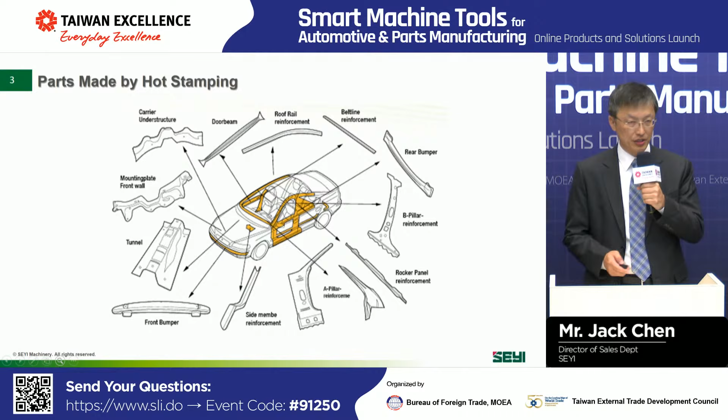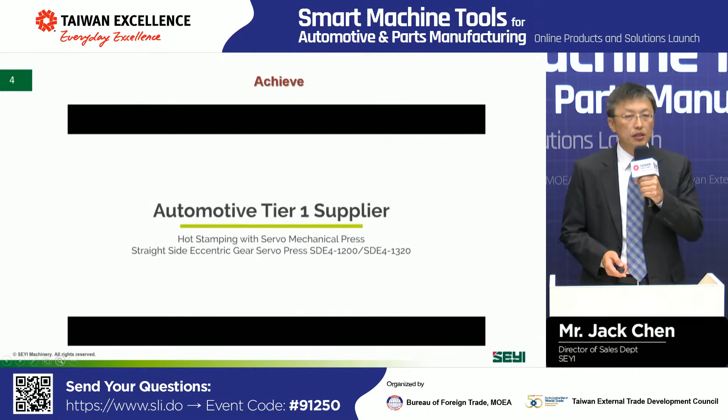This picture shows the components of car body structure made by hot stamping technology. The major ones are the A-pillar and reinforcement body structure parts. The video shows the achievement of SEYI Servopress in hot stamping applications. The press line is located in North America. The customer supplied car body parts assemblies to a Japanese automotive manufacturer.

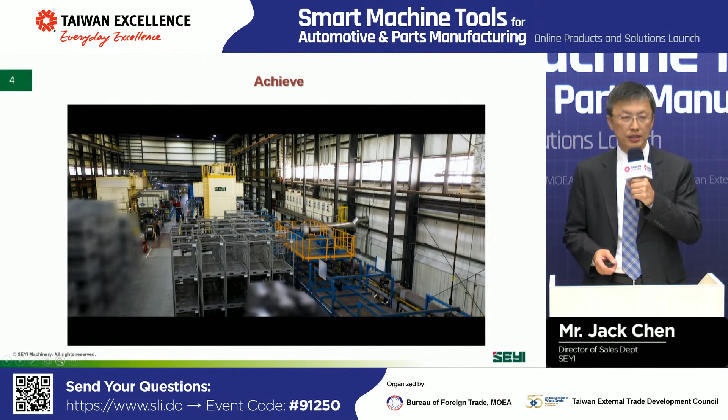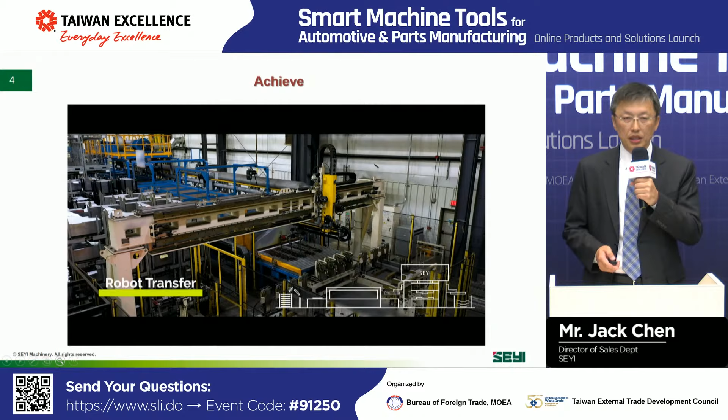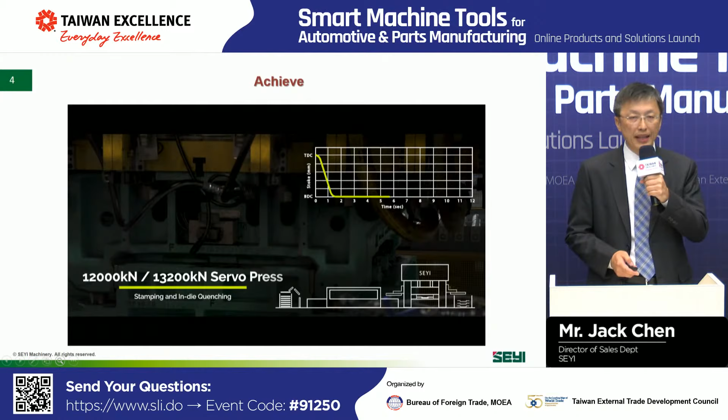Destacker separates the blank from the stack. Robot loads the blank into the furnace. Furnace heats the steel above 900 Celsius. Transfer loads it into the presses. Servopress forms the parts and dwells at the bottom dead center for 7 to 9 seconds. Transfer takes the final parts out of the press.

And this is the end of the line conveyor.

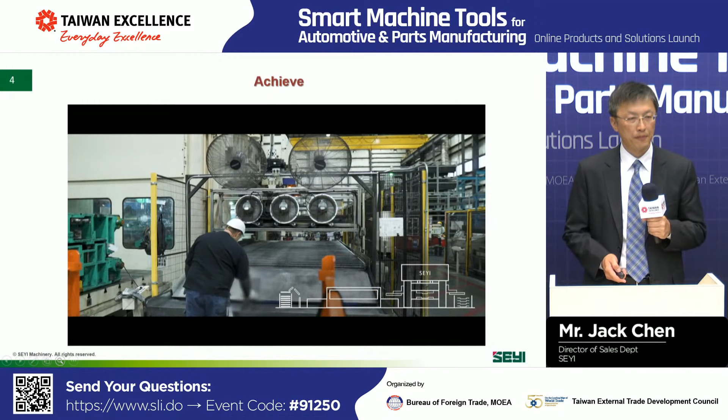Now we would like to explain why Servopress is the best solution for hot stamping application. Servopress is a mechanical transmission design. The hammer downstroke and upstroke speed is much faster than conventional hydraulic press.

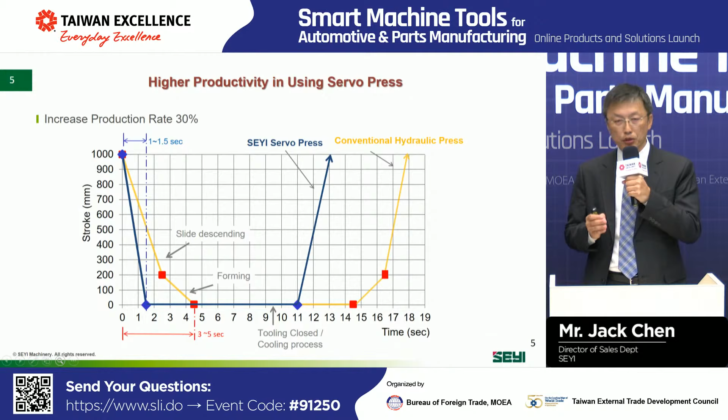Please see the blue line at the chart. Servopress takes only 1.5 seconds to reach bottom dead center, but hydraulic press takes 4.5 seconds. The total cycle time of a Servopress is 5 seconds faster than conventional hydraulic press. Servopress increases production rate by up to 30%.

When the hammer is at the bottom dead center, Servopress uses a mechanism structure to maintain the press's tonnage capacity. There is almost no power consumption during the 7 to 9 second dwell at the bottom dead center for the cooling process. Hydraulic presses maintain tonnage by running a hydraulic power system, which includes a motor and pump.

Servo system has a much higher energy efficiency rate than hydraulic system. SEYI servo system uses air cooling, but hydraulic presses use water tower cooling. Servo presses can save up to 70% energy and 50% running cost.

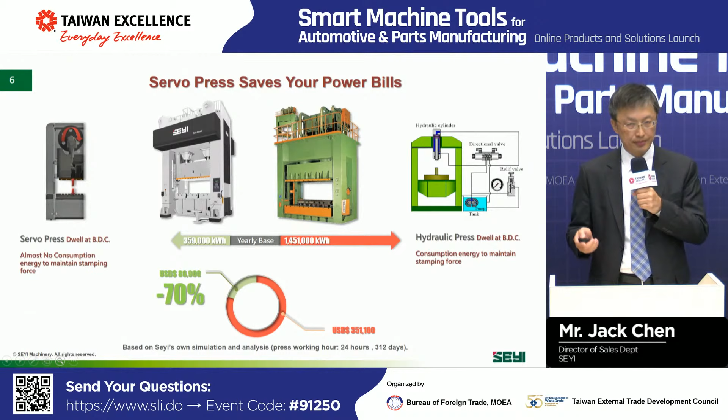Servopress takes less duration during downstroke and the forming parts. It means Servopress has extra time available to do in-die piercing, trimming, or punching holes before reaching 500 Celsius during the cooling process, which is the lowest temperature limit before the material gets too hard to cut.

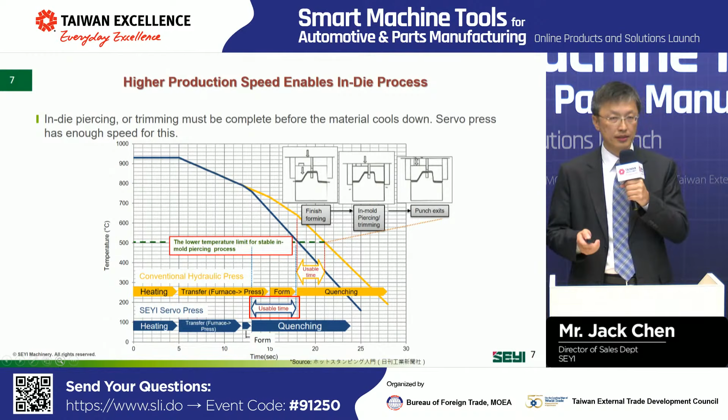When the hot blank stays in the tooling, the blank temperature in the area touching the tooling is lower than where it's going to form.

Servopress has a fast forming speed. It can minimize the temperature difference between the two areas and reduce the thin material effect, as shown in the chart. Also, the fast forming speed feature allows the steel to start the cooling process at a higher temperature point, giving the cooling process enough buffer to minimize the possibility of producing defective parts.

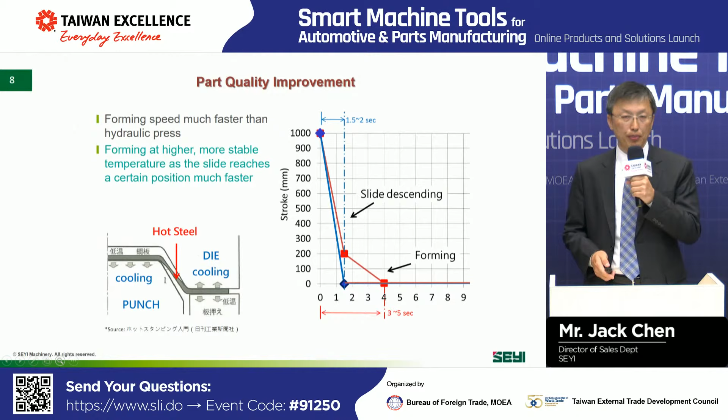SEYI's servo motor is specifically designed for stamping process applications with higher torque and lower RPM features. It can be applied to a standard press transmission design without adding a reducer or link mechanism in between. Simple design is the best design.

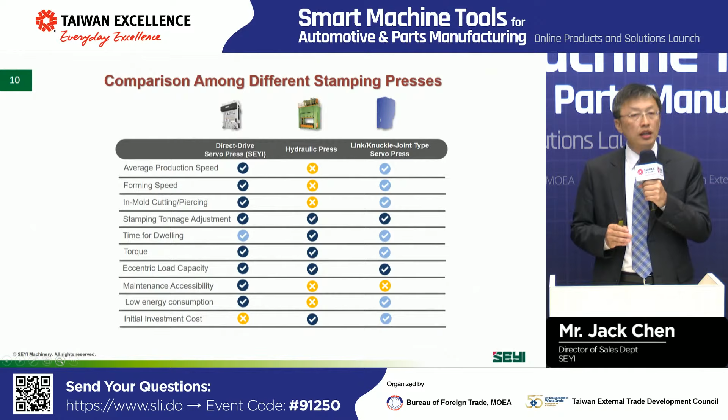This is the chart summarizing the Servopress's features for hot stamping application. The Servopress has the best performance compared to other press solutions in features such as production rate, forming speed, piercing in tooling, offering full torque during die crossing, low maintenance time and cost, and effective energy consumption, which is low running cost.

Servopress is a new generation stamping press. Its benefits include free and accurate motion control to give customers flexibility in production, deliver high quality parts, and save energy. It is also smart and intelligent to support IoT and Industry 4.0.

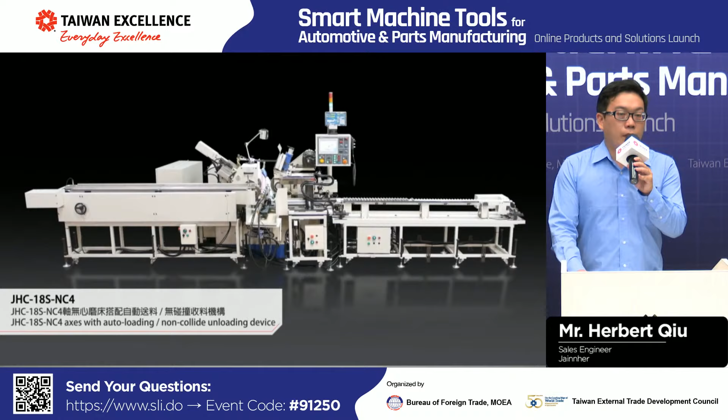A grinding machine, also known as a grinder, is a type of machine using an abrasive wheel as the cutting tool. It is used to finish workpieces that must reflect high surface quality and precision of shape or dimension, which are hard to achieve by just using a turning machine.

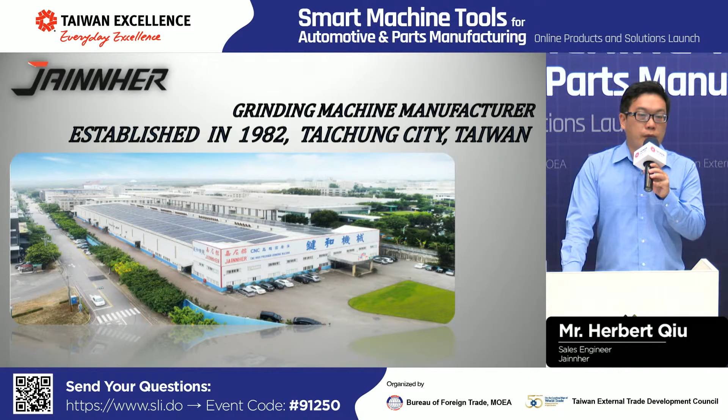Jainnher is a professional grinder manufacturer in Taiwan, established in 1982. Our headquarters is in Taichung City, Taiwan, and we have a branch in Kunshan City in China, providing after-sales service for the Chinese market. This photo shows Jainnher's Taichung factory.

All of our products are assembled here, all made in Taiwan. This facility is 17,000 square meters, and currently we have 133 employees.

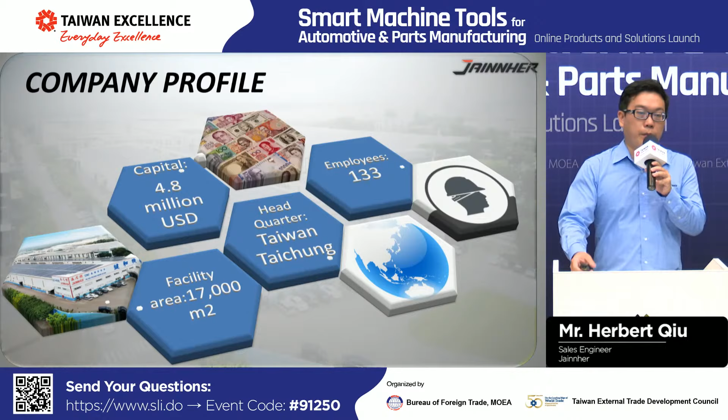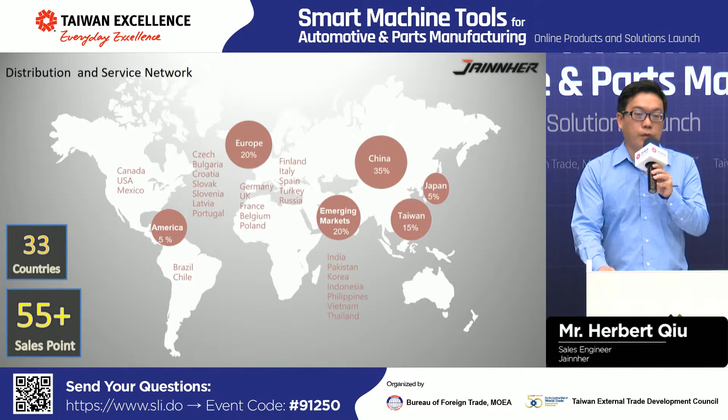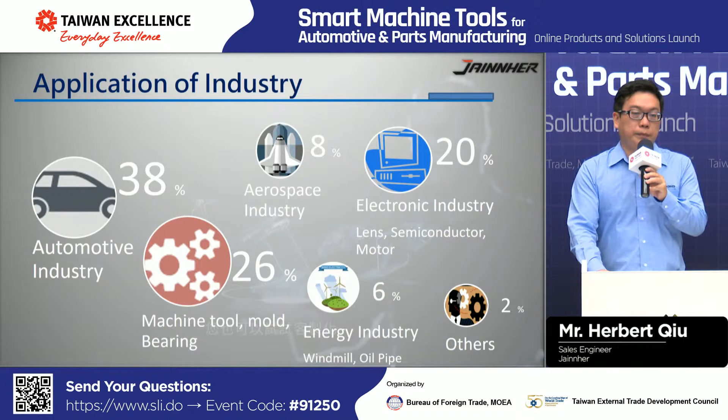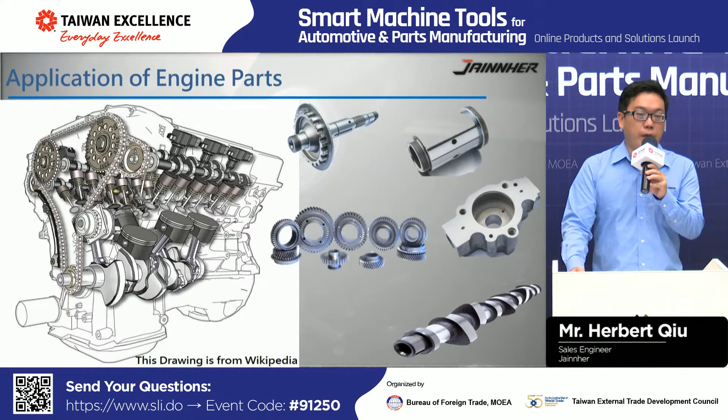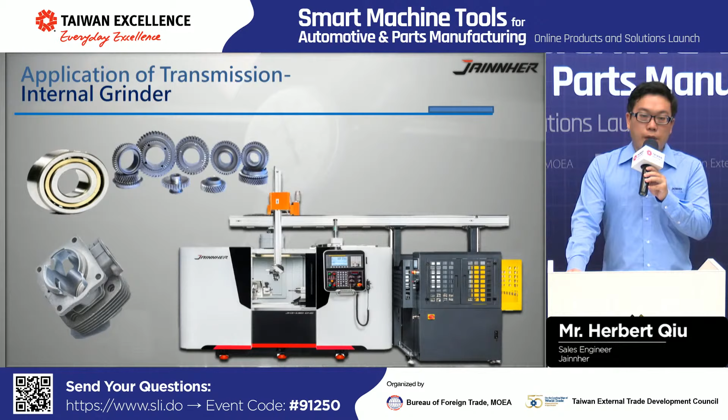Furthermore, for some gears or bearings that require great precision in the internal diameter, we will use our internal grinder. Also, some gears and bearings with both external and internal diameter have specific precision requirements, so we have the double spindle grinder, which can process internal and external grinding in just one machine.

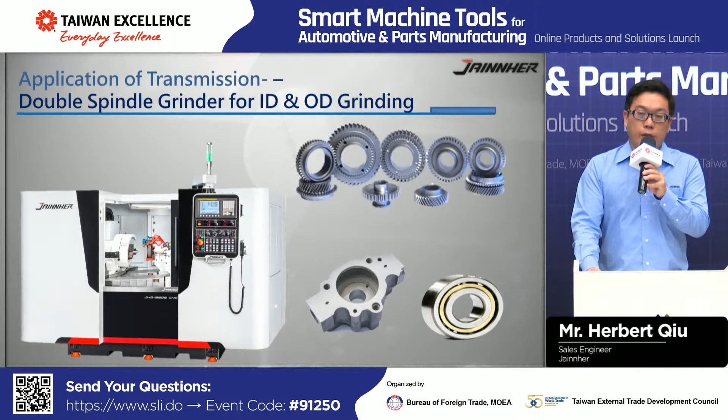Except for the engine system, there are many parts which need to be grinded in automotive transmission. For example, some shafts, like transmission shafts. Most of these shafts will need the cylindrical grinder to handle the external diameter and surface quality.

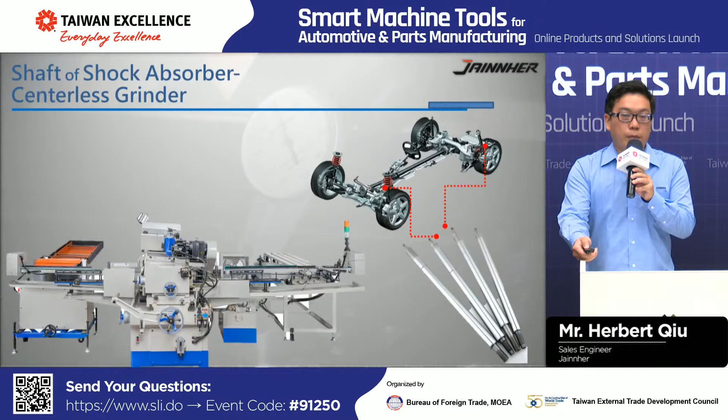We also have a centerless grinder, which is for external grinding. It has outstanding efficiency and is compatible with various kinds of automatic devices that can feed raw parts automatically, increasing production capacity. Here, I would like to show a video about a shock absorber grinding application.

In the video, you can see how the centerless grinder works smoothly with the automatic feeder and the diameter gauge.

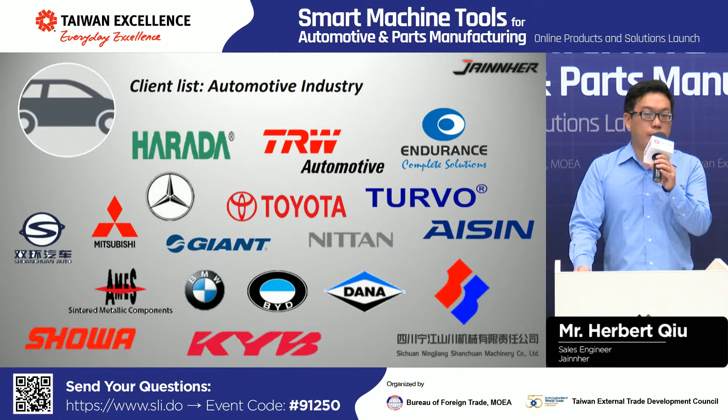For your reference, these are some of our clients from the automotive industry.

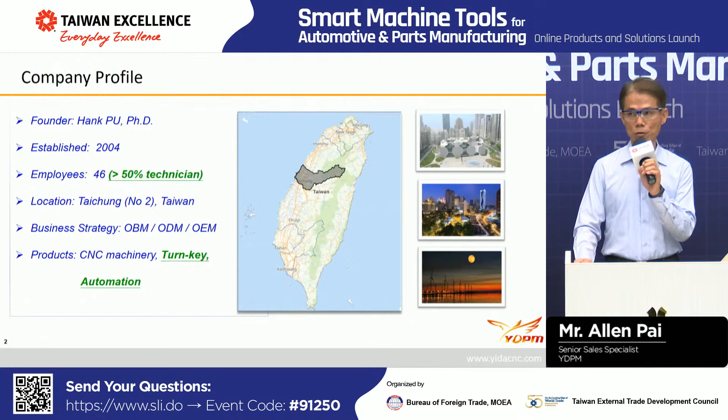In the last 10 years, we got some orders for piston projects. This project is made by our CNC lathe. The case is in Indonesia.

Also, we got some orders for processing parts of the car. This case in Thailand is for mass production.

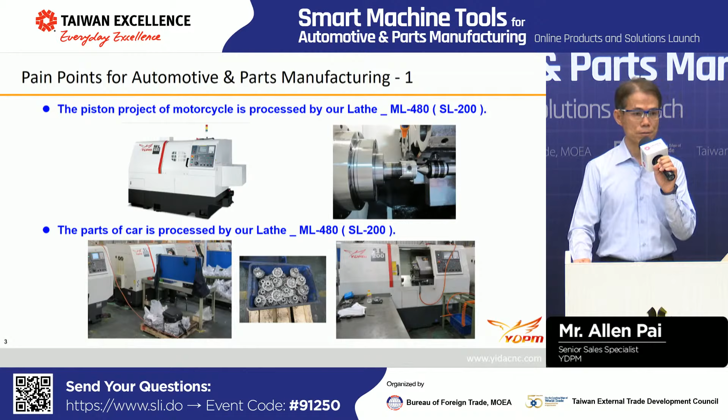Another case, we also sold our horizontal machining center for aluminum car engines. This order is for 13 sets of HMC. Now our machines are working all day, non-stop, and running well continuously.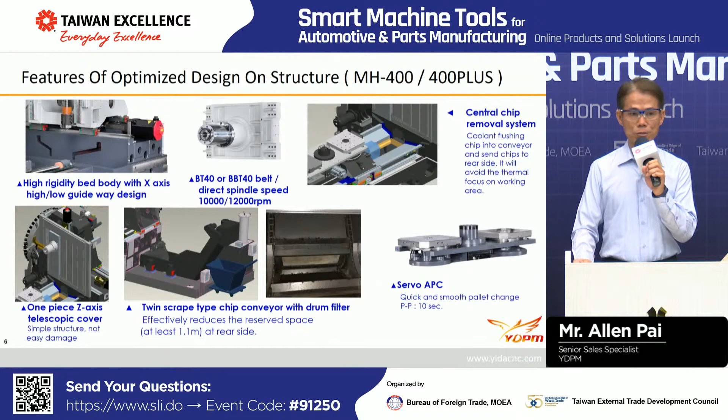This slide is about the features of optimized design on our machine structure. Especially, we designed a high-rigidity bed body with X axis high/low guideway design. We also designed a direct drive spindle, BT40 and BBT40, with 10,000 and 12,000 RPM, and a servo pallet changer for quick and smooth changes.

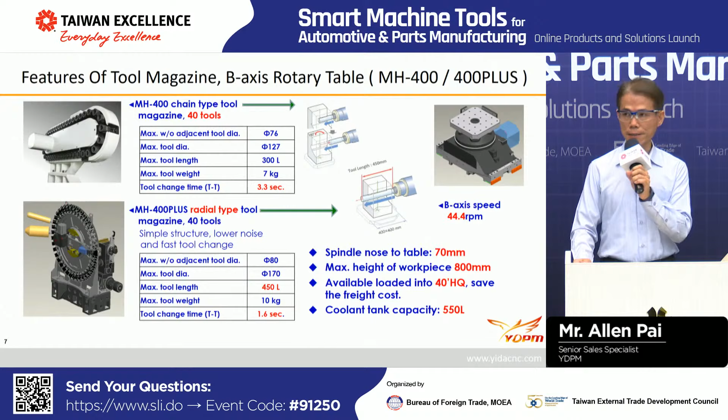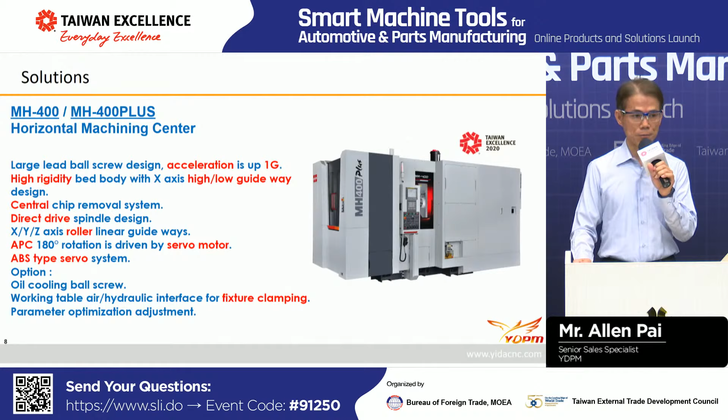Now we talk about solutions on our machines. The HMC machine with the 400 working table, MH400 and Plus, gives you accessories like 1G and high rigidity, high/low guideway, and a central chip removal system. Also, pallet change, servo motor, and ABS type servo system.

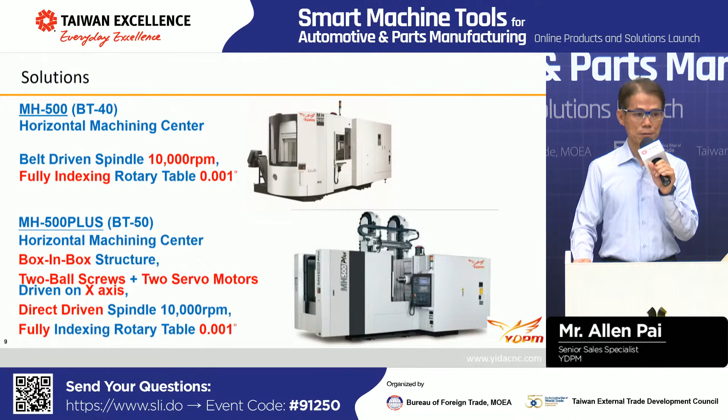This one has a working table size of 500. You can get a fully indexing rotating table on our MH500. Also, the second model, MH500 Plus, features a special box-in-box design and two ball screws with 2 servo motors on our X-axis.

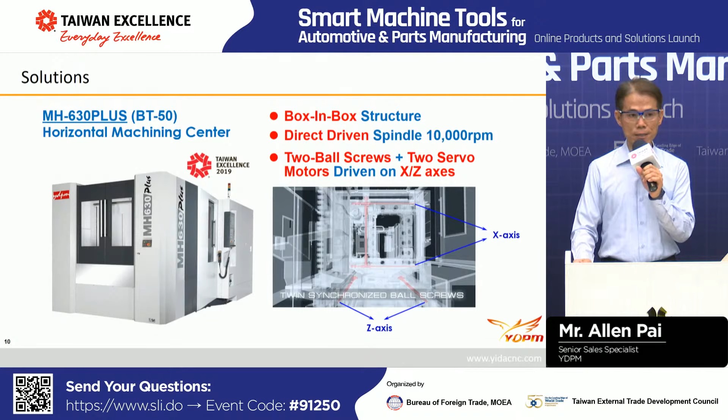This one is our biggest one, the HMC model code MH630 Plus BT50 taper, featuring 2 ball screws and 2 servo motors on not only the X-axis but also the Z-axis. You get smoother and faster moving.

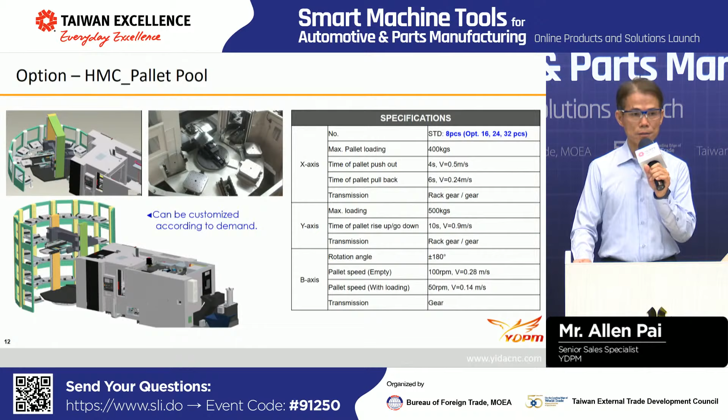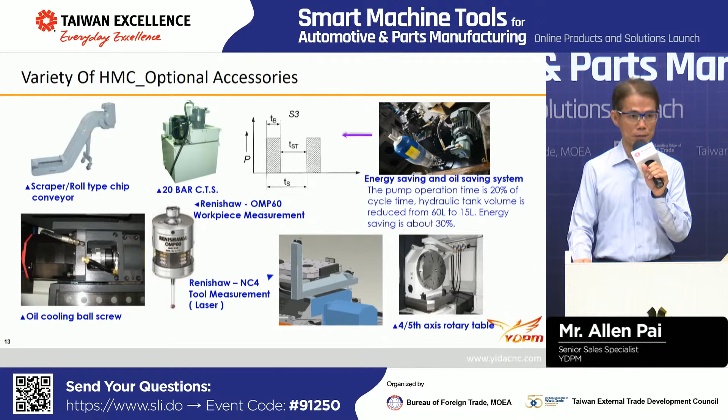These are our main products: CNC turning machines for about 70%, and horizontal and vertical machining centers around 30%. We can also do automation production with robots.

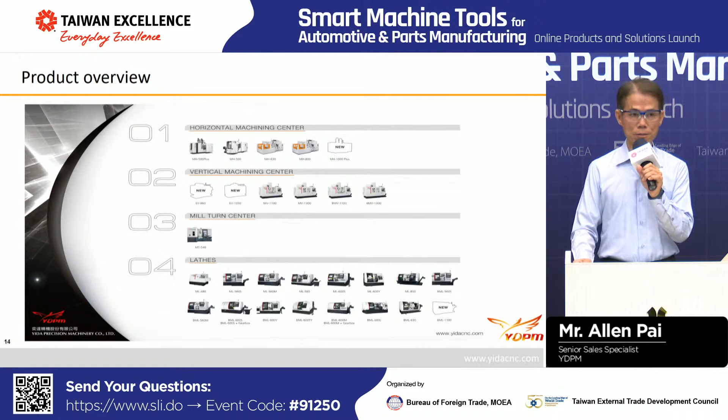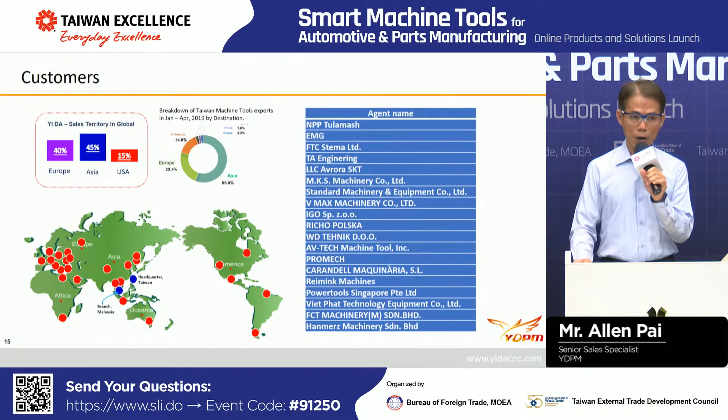These are our customers and our sales territory globally: Europe 40%, Asia 45%, and USA 15%. Our regional office is in Malaysia.

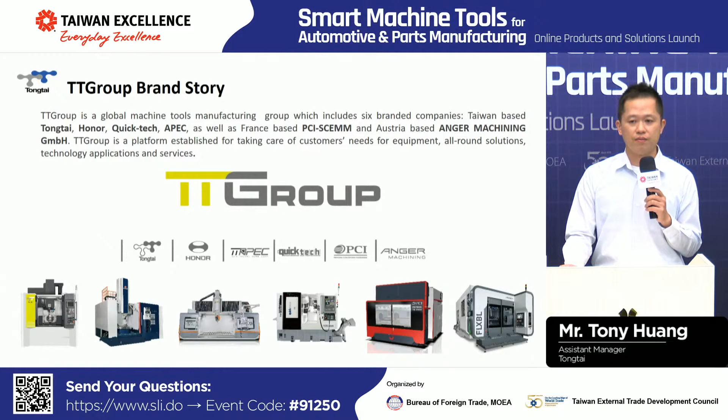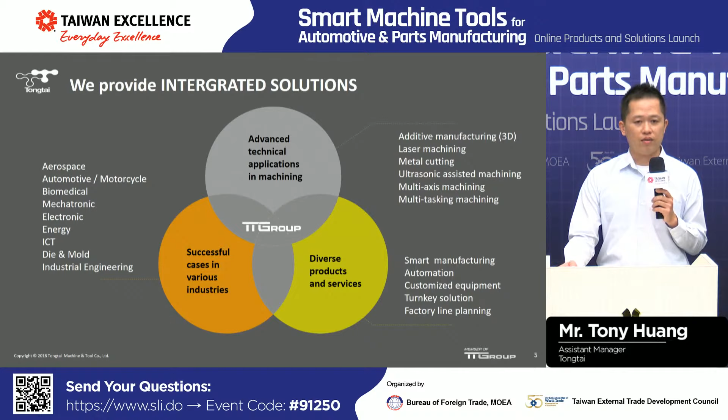The core strength of TT Group is to provide different kinds of solutions for different kinds of industries. Being a total solution provider, Tongtai is not only focused on complete line integration, but also strong in new technology innovation like metal 3D printing and ultrasonic machining.

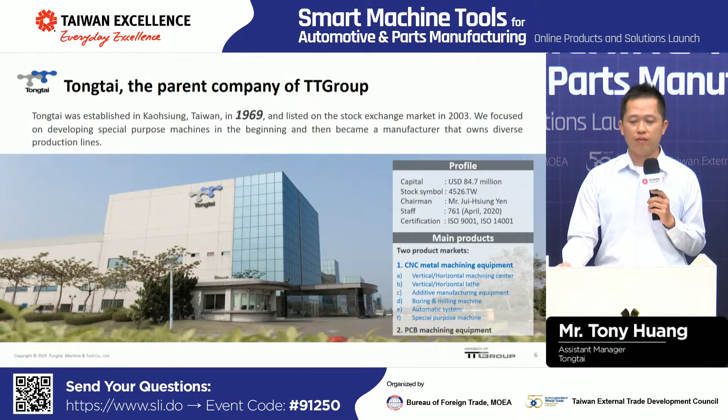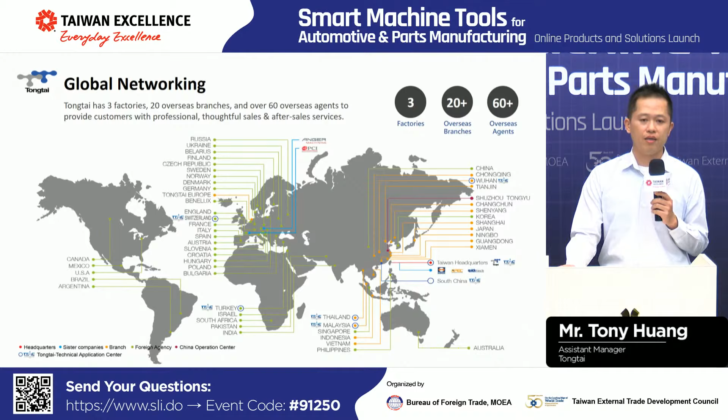Tongtai celebrated its 50th anniversary in 2019. The company started out making special purpose machines, and now we have a wide range of CNC machines. For best customer support, Tongtai has more than 20 branches and cooperates with more than 60 agents worldwide to do marketing and provide immediate service support.

Industry 4.0 is a well-known global trend for everyone. Tongtai is a pioneer in Taiwan by offering the first smart manufacturing line for crankcase machining.

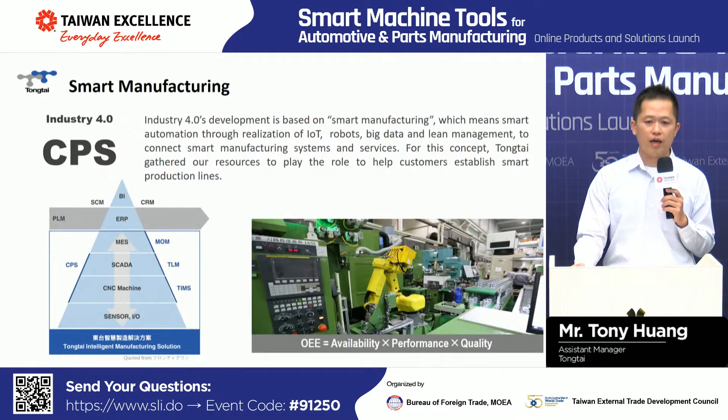How can Industry 4.0 make production lines smart and efficient? How do we reduce defective rate and achieve better productivity when market demand is changing to small volume, large varieties? The following slides briefly show an example of a solution for different types of crankcases to be made on the same production line.

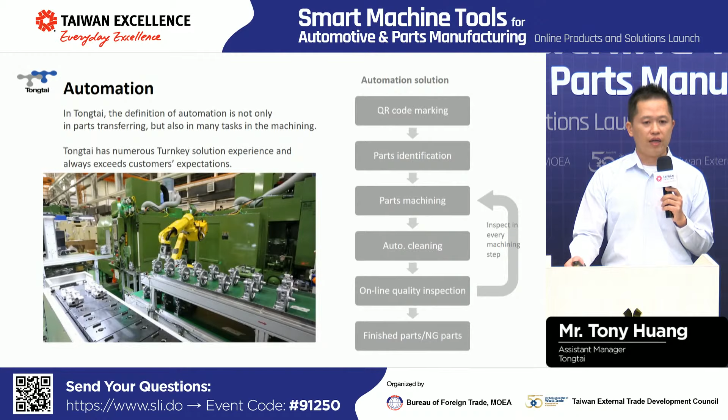Tongtai is able to integrate different kinds of applications or utilize multi-axis machines to ensure the production line is more compact and efficient. Of course, automation should be there. However, the automation we are talking about here covers the complete process from QR code marking, part identification, machining, online inspection, and cleaning, not just part loading and unloading.

We also adopt a cyber-physical system to simulate what we are able to organize, from individual machining programs to complete-line operation sequence. Compared to the past, CPS can find any operation bugs quickly and avoid errors before the production line begins. It saves lead time and cost in manufacturing.

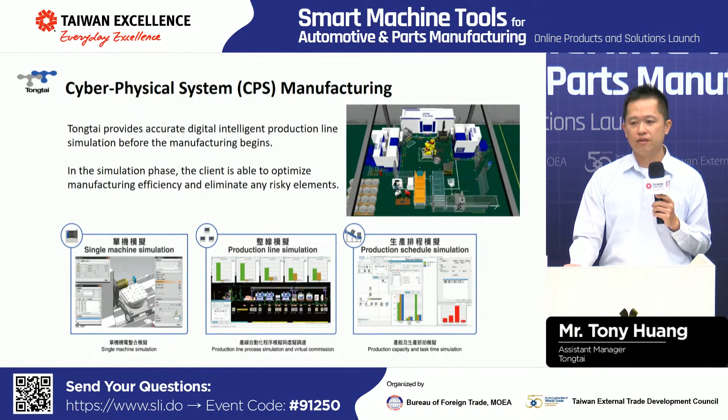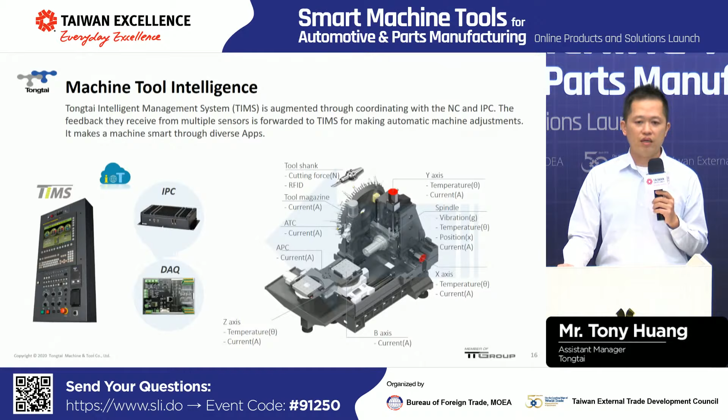To make the machine smart, we install different kinds of sensors on the machine to collect different signals. Through Tongtai Intelligent Management System, which we call TIMS, this signal is converted to production data for monitoring. So once the complete line is connected, real-time production data can be collected and presented in our monitoring platform, and further combined with MES and ERP for production plan arrangement.

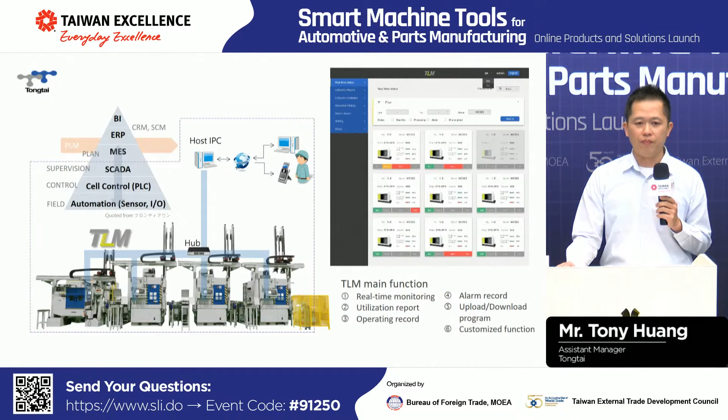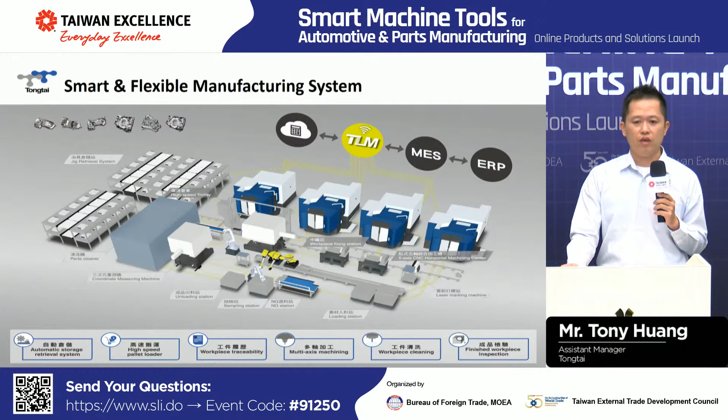There's an absolutely fantastic example, which is the smart manufacturing line we supply for scooter crankcase machining. There are six varieties of parts that can be flexibly produced on the same line. It's not only for part machining, but also includes part cleaning, online inspection, and a huge storage system for fixtures. The next video shows how this line works.

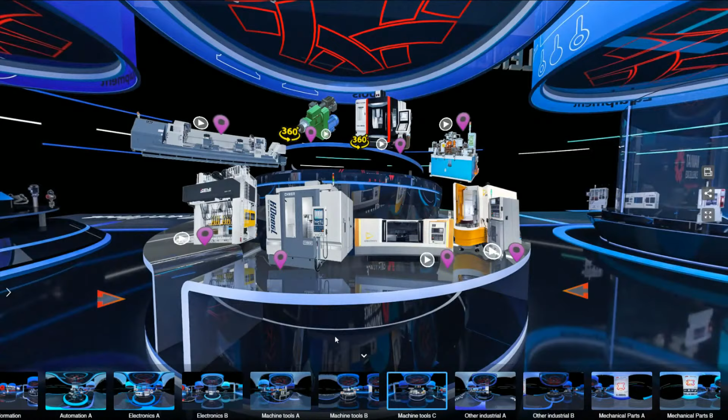The pavilion is divided into 5 zones according to product types. First, let's click the Machine Tool C picture below to get into the Machine Tool Zone. Let's see SEYI. Click on the spot icon below the product picture for its introduction. To know more about the company, just click the fuchsia Contact Supplier button.

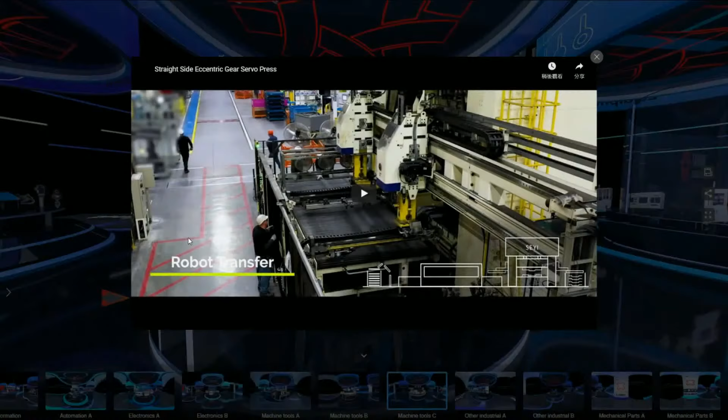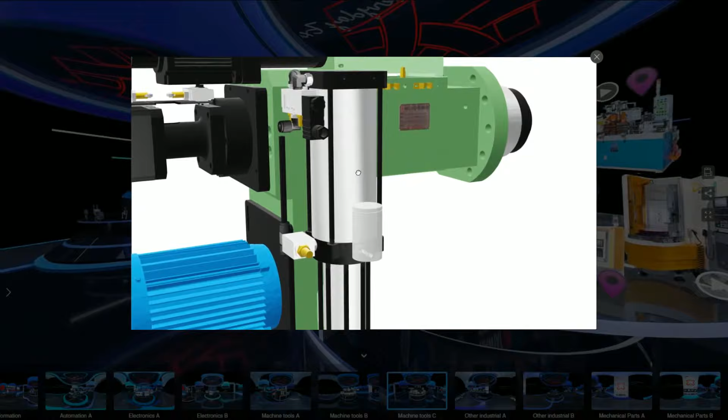Back to the main screen, you can also watch the product video by clicking the play icon below the product picture. Some products have a 360 view function. You can click the 360 icon to view the picture of the product in 3D. Here you can revolve, zoom in, or zoom out for more details.

Click the Machine Tools A and B picture below the screen to check other products in the zone. You can also see other smart machinery products here, such as automation equipment, electronic manufacturing equipment, other industrial equipment, and mechanical parts.